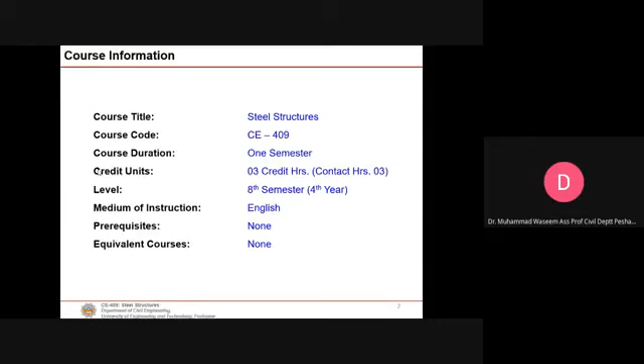Now when we look at the course contents, there is a specific aim of this course: to develop in the students the acceptance that steel can also be used as structural material, other than reinforced concrete. At the same time, the aim is to develop in students the ability to design the various structural members of a steel structural system, such as beams, columns, tension members, and connections.

So the aim is that we should develop acceptance about using steel as a structural material in the students, and also develop the ability in students to design the various structural members of a steel structural system.

Now looking at the CLOs, there are 3 course learning objectives. The first is about the description of models and theories suitable for the analysis and design of steel structural members. The second is to develop in students the ability to carry out analysis of steel structural members under axial, flexure, and shear, and to analyze connections under axial loads. The third CLO is to do the design of steel structure members under axial, flexure, shear, and also the design of connections under axial loads.

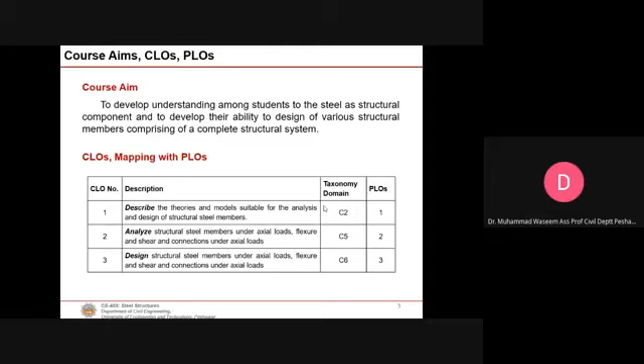In this slide you will find the assessment details and activities related to this course. There are three categories. First is sessional activities, comprising assignments, quizzes, and a complex engineering problem. There will be 3 assignments and 3 quizzes. I have not distributed the assignments and quizzes according to the class schedule yet, but hopefully by the 3rd class you will get the first quiz.

The percentage weightage of assignments, quizzes, and complex engineering problem will be 20%. There will be a midterm carrying 30% of the marks, and a final term carrying about 50% of the marks. This distribution is tentative and coupled with the direction and policies of the coordinator office, so it is subject to change based on their recommendations.

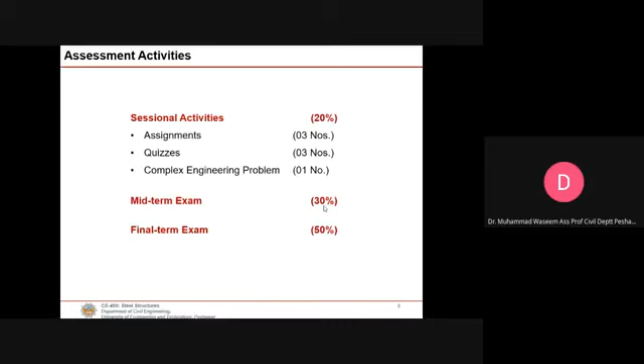The topics which we will cover in this course are mentioned in this slide. Today we will have an introduction to steel structures.

Then we will talk about the design philosophies, the different philosophies we can use for the design of steel structures, which we will discuss in the next class. The philosophies are allowable stress design and load resistance factor design. We'll go through those philosophies, and then shift our focus to connections.

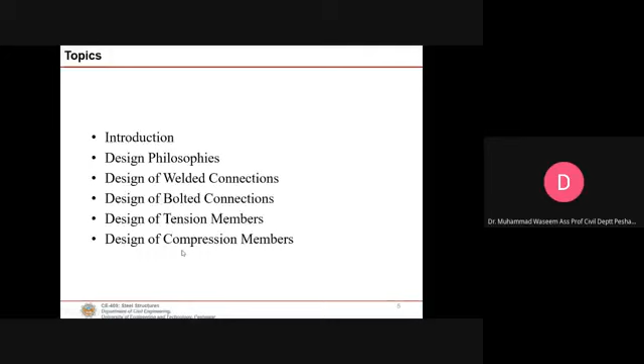There will be two types of connections we will discuss: first bolted connections, then welded connections. Once done with connections, we will shift to analysis and design of tension members, then the design of individual compression members. Then we will discuss column base plates, beams, composite beams, and lastly plate girders.

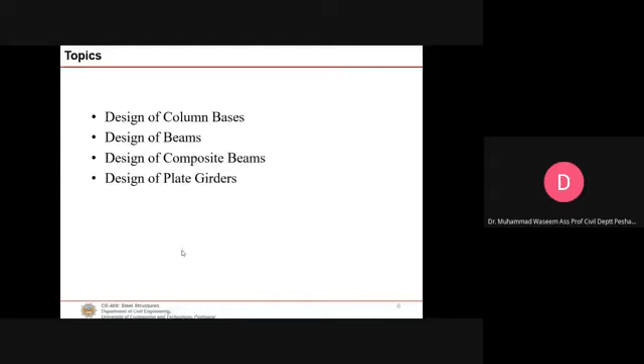Okay, this is all about the contents of this course, what we will be covering this semester, hopefully. So for books, you can refer to any one shown on this slide. You can see there are three books. The first book is by Segui, 5th edition.

I would recommend, or I will stick to, the first book, Steel Design. But you can consult Design of Steel Structures by Gaylord as well, the 3rd edition. This book is available in your library. There are a good number of books you can pick from, or issue from the library.

Then there is Structural Steel Design by Jack McCormac. You can find that book on the internet, but I have uploaded Steel Design by William Segui in your class, so you have downloaded that book.

So today's lecture is concerned with, or will be targeting, chapter 1 of the Segui book. Why I suggest we use the Segui book is that it's based on the most updated knowledge in steel structures. The Gaylord book was published in 1994, and after that, as far as I know, this book has not been revised, but things have changed since then.

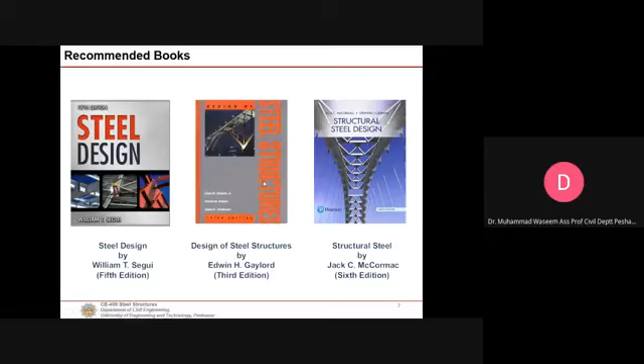I will stick to that book, but basically the information is the same, so you can consult any of these books. As I told you, one thing I missed is that our focus will be the design of individual steel structure members in buildings. We will not talk about bridges. In order to carry out steel structure design, we must have a manual or specification.

That manual is what we call the AISC manual. In the slide you'll see there is a 2nd edition of AISC, called Load and Resistance Factor Design, but as I told you, nowadays we have the 15th edition of this manual.

Things have been updating ever since the 1990s, so we will not use this older manual, but most things are similar across manuals. I have a soft copy of, I think, the 12th edition, and I will upload it in your classroom as well.

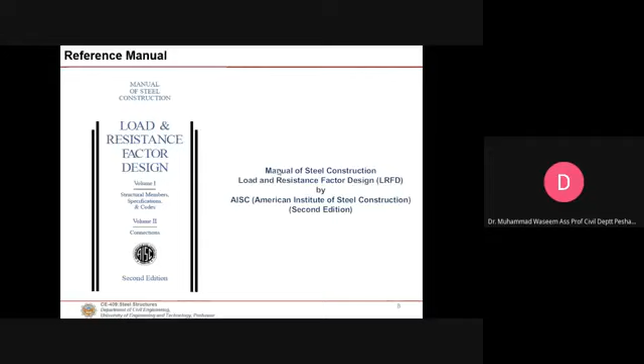I just wanted to inform you why we shifted from Gaylord to the Segui book, and what manual or specification we will use for designing steel structure members. Without a manual, you cannot carry out the design of steel structures, because the manual contains a lot of information about structural shapes, different materials, and design aids you can use while designing these members. That's why the manual is very important in this course.

So this brings us to today's lecture. Today is just an introduction to steel structures. When I deliver a course, I set some outcomes or objectives for the lecture. The first objective for today is to introduce the design process in steel structures and the different steel materials. Steel is an alloy, so what are the different steel materials you can opt for in design?

We have some designated steels, like you will see A36, A992. So what are those steel materials? We will talk about their behavior by looking at their stress-strain behavior graphs.

Then we will talk about different structural shapes. In reinforced concrete design, you might design a T-beam or a rectangular beam, but in steel structures you have to use different structural shapes. Those shapes can be wide flange sections, angles, channels, or T's. I will introduce those shapes in class.

Then, in order to design buildings, you need a code. What were the different codes used in the US? What is the currently most active code in the US, and what is the status of that code in terms of Pakistan, like what code is being followed? Then we will talk about the difference between the building code and specification. A specification, as I told you, is a reference manual. What is the difference between them?

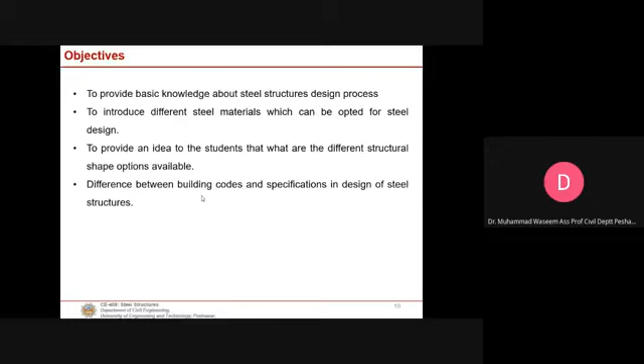These are some of the outcomes which I have set for this lecture. At the end of the lecture we should accomplish all of them. So as far as today's lecture content goes, we will talk about the structural design process.

Basically this design process and the design process for reinforced concrete design are similar. Then we will talk about building codes. What do we call building codes? What are the examples, what different building codes are being followed? Then we will talk about the design specification, and then about structural steel material.

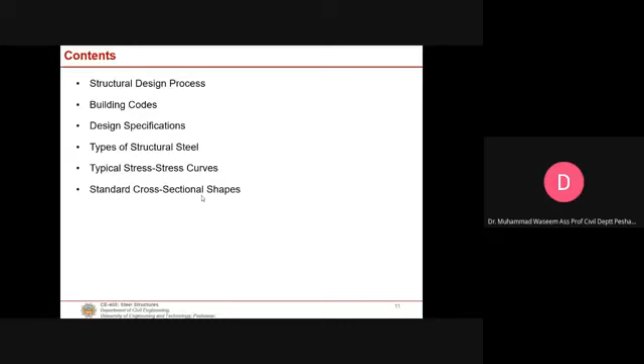We will talk about their behavior by looking at their stress and strain curves. Then we will talk about the standard cross-sectional shapes which you will be using for design of your member while selecting them. Now, first is structural design.

Structural design means the overall proportioning of the structural resisting system. Whenever the architect gives you a plan, it's a building plan. Buildings can be subjected to different kinds of loads during their lifetime. We design buildings for 50 years, and for that we have to come up with a structural system. That structural system consists of columns, beams, girders, and eventually, in order to transfer the loads, we also go for a supporting system of the foundation.

In order to proportion the structural cross-sectional members, there are loads acting on a building, and those loads are transferred to the ground through columns and beams. Now, what is their cross section? We have to keep the resistance of individual members greater than the applied load effects, and that is accomplished through using area or cross-sectional area together with the material.

So in structural design, we do the overall work - we devise a structural system which consists of columns, beams, and foundations, and we also proportion the individual structural members based on the resistance which they derive from cross-sectional area and the material.

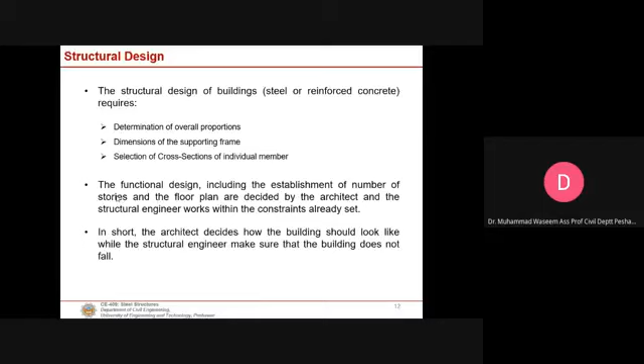Now, once the functional planning is done, that is handed over to a structural engineer. The structural engineer has to devise a structural system consisting of different structural members in order to transfer or resist the applied loading during the lifetime of the building.

Now we will go to the design process, and there are different phases in the design process. As I discussed, the first phase in the design process is the functional planning. Let's take an example of this academic block - what is meant by functional planning for this academic block, like what should be the sizes of the rooms, where should the windows be located, where will the corridor be located, and how many stories will there be in this academic block.

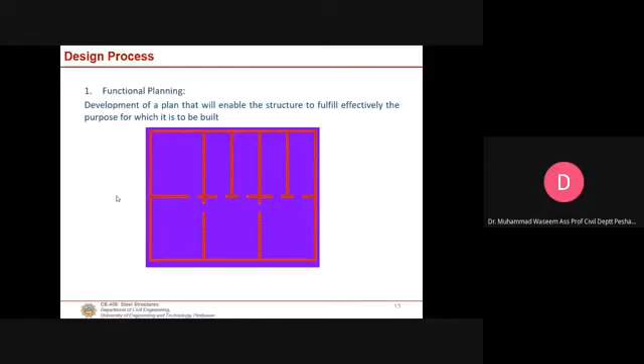This is called functional planning. We can call it the development of a plan that will enable the structure to fulfill effectively the purpose for which it is built. This is done by an architect, and once the functional planning is finished, the plan is handed over to a structural engineer.

So the second step in the design process is the structural scheme. What is a structural scheme? It's about devising a structural system which consists of columns, beams, girders, and slabs. This is done by a structural engineer.

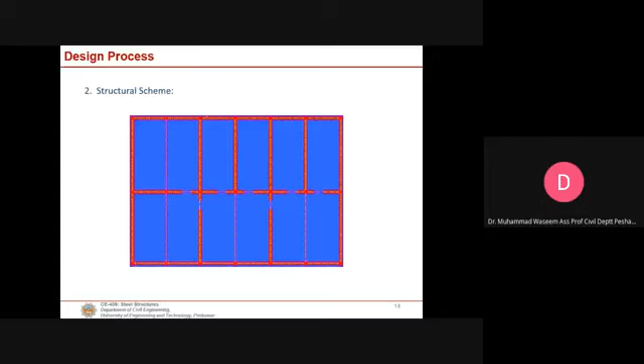It's the structural engineer who decides the overall proportioning of the plan, like where the columns should be located, where the beams should be located, how much will be the sizes of the beams, and how much will be the sizes of the columns. This happens after the functional planning, when the structural system is devised by the structural engineer.

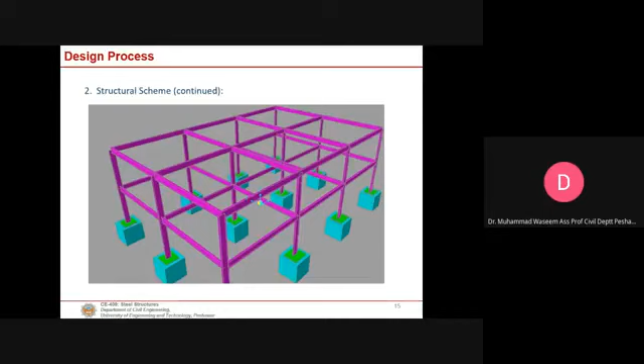So this is a continuation of that structural system. You use beams, you use compression members, and you might be familiar with these components from your concrete design studies. The loads are transferred from beams to columns, then to the base plate, and finally to the ground. This is just a 3D view of that structural system.

After the functional planning and the structural scheme, you have to come up with the individual sizing of the members. There are some guidelines to select individual beam members. For example, the length to depth ratio of a member should be less than or equal to 800 by Fy. Say you want to select a beam, you have to decide about the depth of that beam.

This guideline will be a rough estimate. Like we have seen, in case of simply supported or continuous members, we always take a start from h by 20 or h by 16, if you remember.

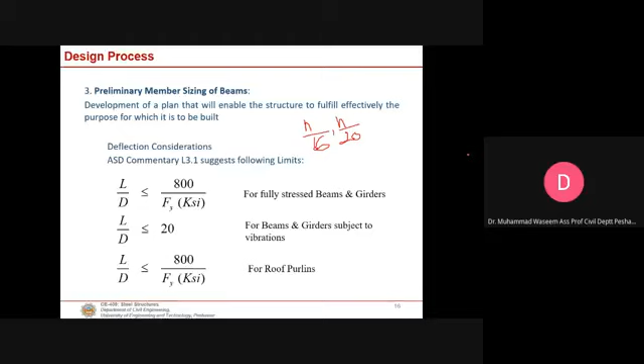So you have to do the individual member sizing for beams, and then use some criteria to select the cross section for the beams, and similarly for the columns.

In steel structures, your beams are susceptible not only to material failure, but they can also fail due to stability issues. There are two types of such failures: one is local stability failure, and the other is global stability failure.

Once you want to avoid stability failure, you have to provide some bracing. For example, there are two beams. This is called an I section or wide flange section, and it is susceptible to translation when loaded, as well as some twisting, which we call lateral torsional buckling. In order to avoid these stability failures, these beams are braced like this.

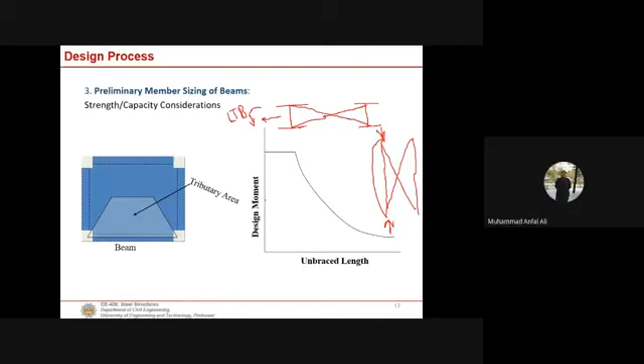You have to use a larger cross section. Okay sir, but you have to do this bracing, like what I have studied in steel structure. These beams are located at a very high height, and bracing you have to do because these beams are susceptible to twisting and translation when they are loaded.

And in order to, reinforced concrete design में आप क्या करते हैं? You don't want to have a bar slip, that's why you provide those hooks. अगर वो hooks आप provide नहीं करेंगे तो हो सकता है कि उसकी फुल यील्ड स्ट्रेस डेवलप होने से पहले ही वो फेल हो जाए, बार स्लिप का प्रॉब्लम आपके पास आ जाए. So that's why you use deform bars and you provide those hooks.

But I wanted to highlight that this is an important aspect in steel structure, bracing. You have to do bracing. Like, for example, if the height is not that much, you will have to check first: is my member failing in local buckling, is my member failing in translation? If it is not failing, if the load is not that much, you don't have to do the bracing. Is that clear to you now?

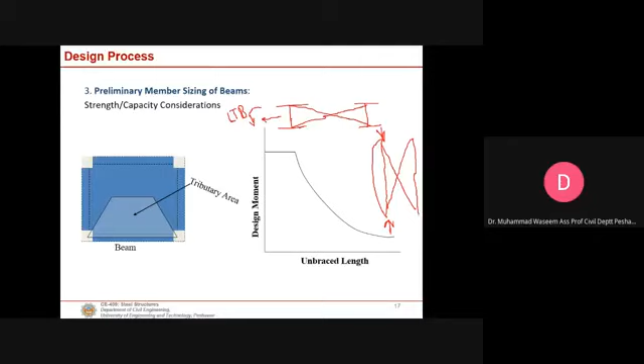Yes sir. Okay, now similarly, if we proceed, then we come to the column. In column, what happens is load comes from the slab and is transferred to the ground through these vertical members. You also have to do proportioning of these columns. And one other aspect, as I highlighted in case of beams, is that not only can it fail in material failure, it can also fail in stability. If there is a stability issue in your beams, you have to do the bracing.

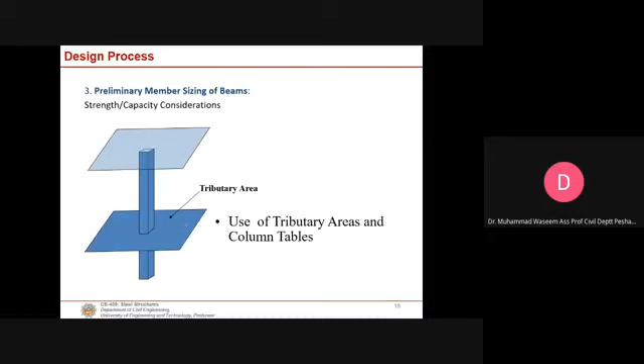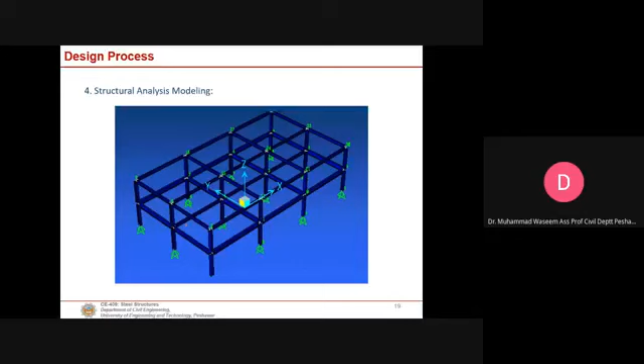So after that we have this step we call the structural analysis, and you can see this is a 3D view, a model of that building which has been generated in a software. You can use SAP or ETABS software to come up with this model. Once you do the structural analysis, you compute the demand in your members.

Once you know the demand, then you have to do the design review. Design review means that the demand on your structural member should be less than the resistance provided by that member, and that resistance is derived from the cross-sectional area and the material strength. So the resistance in the member against the demand should be more, and you should also keep a margin of safety in that.

Like there, if the demand is 2, the capacity or resistance which the member is providing, it should be 4. So you will keep a factor of safety because you are not sure about the live loads as well. So you have to take care of that.

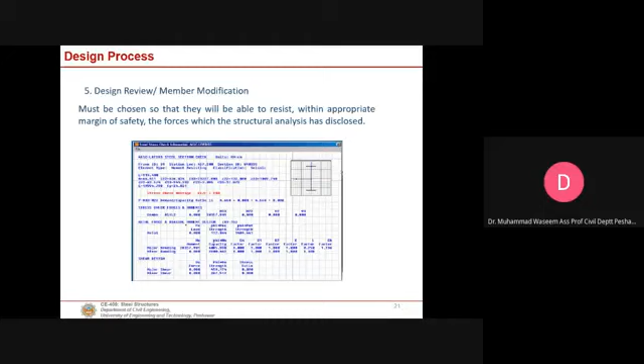Then finally, once you are done with this process, you make cost estimation for various tentative structural layouts. Like if I use this member, I place it there - how economical it is, am I satisfying the strength criteria, is my building able to resist all the loads. But the thing is, in case of steel structures, your objective should be that you should use minimum amount of steel.

And in steel structure, you have to use members which have light weight. If the weight of the member is more, the cost of the member will be more. Now this cost estimation not only depends upon the structural members, but it is also controlled by the labor, who will be fabricating this steel structure building. So the cost of the skilled labor is also important because the skilled labor cost in steel structure is very high. So you have to do all this consideration.

You will also look at the availability of the steel material. For example, you are making a building in Karachi - in Karachi you have a lot of factories producing steel, so there is no issue. But for example, you are building a steel structure in Miranshah or some other area which is very far away, so you will take care that the material you're using is available in the market and will not be too costly for your design or structure.

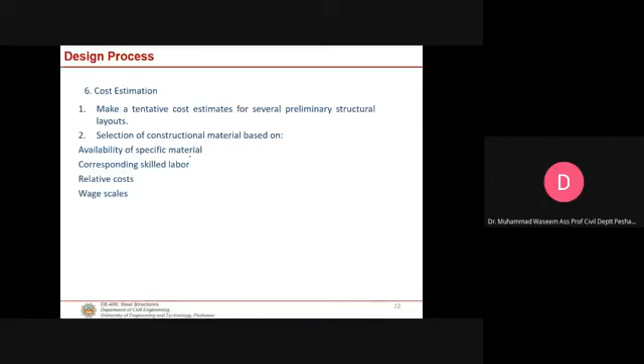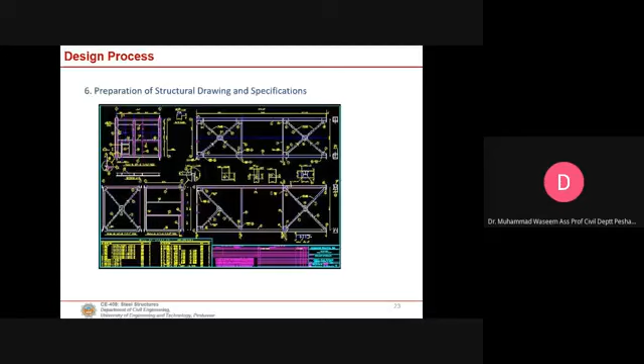You know this process, you have been familiar with this process, but what I wanted to highlight is that in steel structure, you will use different shapes. You will not use those rectangular or T sections. So stability is also an issue. In steel structures, this issue was not there in reinforced concrete design, but in steel structures it matters.

Once we are done with the design process, this is the philosophy of structural design: the resistance of material, which it derives from the cross-sectional area and the material strength. When we talk about material strength in steel structures, it means the yield strength and the ultimate strength. Now, the strength of the material or the resistance of the material should always be greater or at least equal to the effects of the applied loads.

This is a very important and basic equation, but there is a constraint on this equation: you should evaluate the resistance, for example resistance against compressive force, against the stresses produced by compressive forces. You cannot evaluate the tensile resistance against the compressive load effects. So basically, you have to evaluate or use this equation for the same loads.

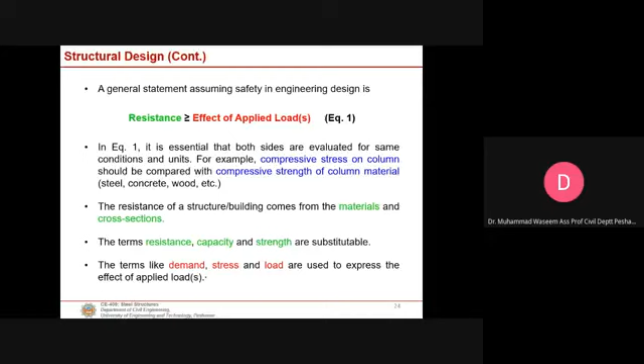In structural design, sometimes there will be terms which have the same meaning, like resistance, capacity, and strength - they mean the same thing. And terms like demand, stress, loads - they are the same thing, used to express the effect of the loads.

So in structural design, you have to satisfy a limit state as well. A limit state is a condition. A limit state is a condition beyond which a structural system or structural component ceases to fulfill the function for which it has been designed. So you have to satisfy the limit state in structural design in LRFD. There are three types of limit states.

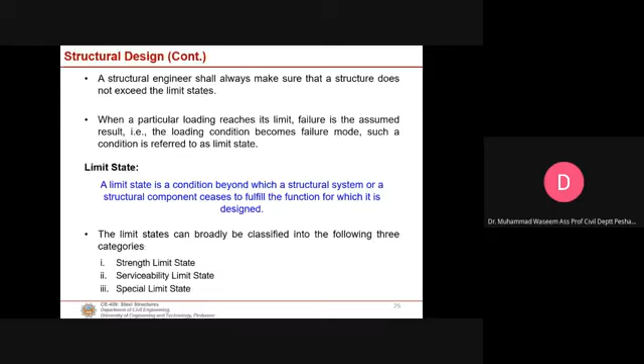We call them strength limit state, serviceability limit state, and special limit state. Strength limit state means that the bending moment or the shear or the torsion should not exceed the capacity or the resistance of the material or the member. And obviously, there must be some factor of safety between the resistance and the demand.

The second is the serviceability limit state, which means that you should avoid cracking, deflection, buckling, and stability. The third type is the special limit state. A special limit state - you have to consider that the life of a building is 50 years. In that 50-year time, it should be able to resist any explosion, or loads caused by earthquakes or wind loads. So these are called the special limit states.

Now, special limit states are costly. For example, if you want your building to satisfy the special limit state, it will make your structure costly. It's not economical to go for this limit state. But in areas where you experience earthquakes regularly, you have to satisfy this limit state.

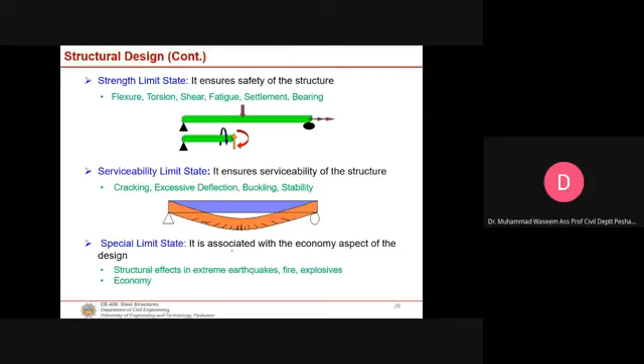So as I told you, the aim of the structural engineer for the design of steel structure should be to use a lighter structure - this will make your structure economical. The other factor is that the labor cost for steel structure is very high, and you have to consider it while deciding where you want to build that structure.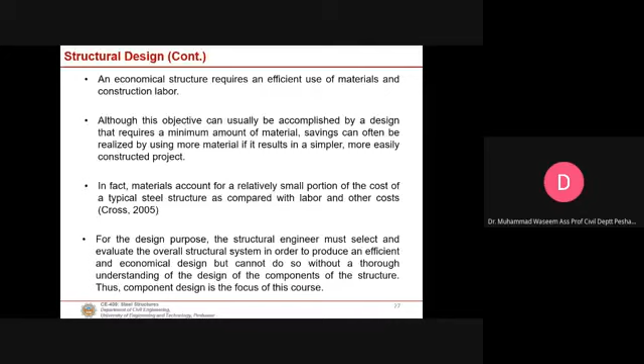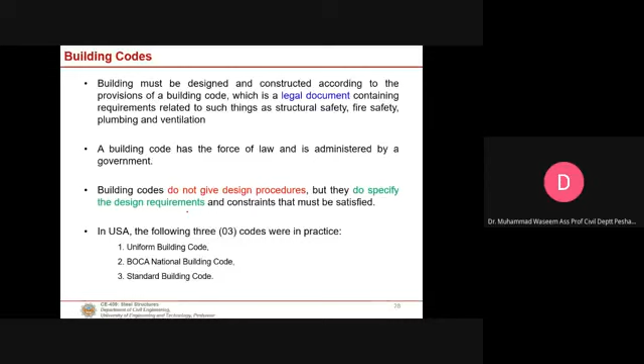In US there were 3 codes: Uniform Building Code, BOCA, National Building Code, Standard Building Code. They were practiced in US, but there were some inconsistencies among these codes. So in 2003 they came up with a new code called International Building Code, which is the most followed worldwide. So the most recent version of a building code is International Building Code.

Of course, we have some Euro code as well, but in the context of US, the most recent version of the code document is International Building Code. Before that, Uniform Building Code was adopted. Now in Pakistan, the building code of Pakistan has been adopted from Uniform Building Code, but now we are trying to adopt the International Building Code. So what is the most recent code of practice nowadays? You should know that it is International Building Code.

And there is the loading code, American Society of Civil Engineers 7, titled Minimum Design Loads for Buildings and Other Structures. So ASCE 7 and IBC are the most updated versions of the codes. IBC is a complete code, but it uses loads, and for loads it refers to this ASCE 7 document, which is Minimum Design Loads for Buildings and Other Structures. Now, the following codes and standards are currently being used in US, as per when this book was published.

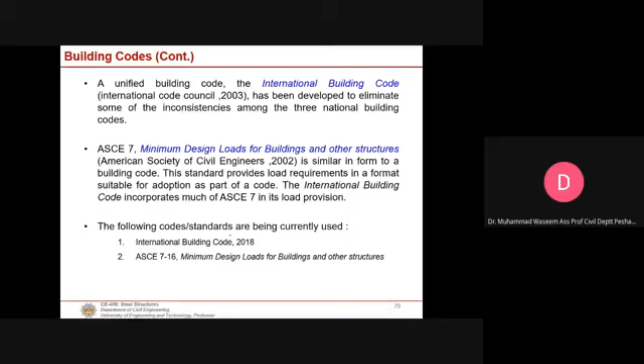Let me come back to the classroom. Yes, sir. Okay, any question or comment? No, sir. Okay.

These design specifications have no legal standing, but you can adopt them in your policy. For example, the government can adopt it and force it that you would use this specification.

What is the example of specification for the case of concrete structure design? Do you have an idea? Any idea? Which specification do we use for concrete structural design?

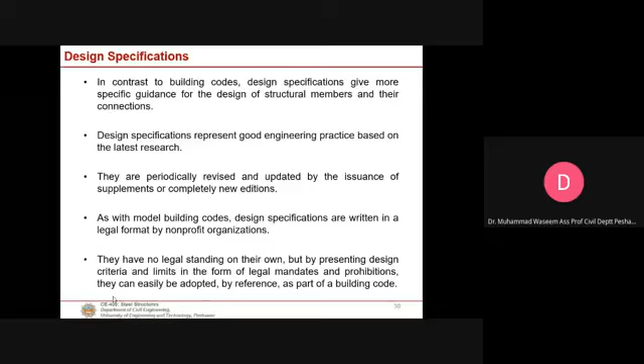Okay, in concrete we use ACI, American Concrete Institute specifications. They have equations, so when you see an equation in your book, it is coming from ACI 318. Similarly, in steel we will use American AISC, American Institute of Steel Construction specifications. They contain important equations which you can use for the design of your structures.

So what are the different specifications? As I discussed, we are going to use the American Institute of Steel Construction specification, which provides the design of steel structure buildings and their connections. This is of our concern, because in our course we will study design of structural steel members of a building and their connections, so we will extensively use AISC.

So if you want to design steel structures for a bridge, you can consult this specification, which is AASHTO. AASHTO stands for American Association of State Highway and Transportation Officials. It covers the design of highway bridges and related structures.

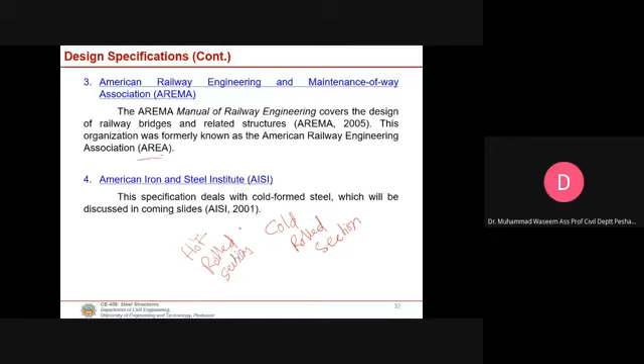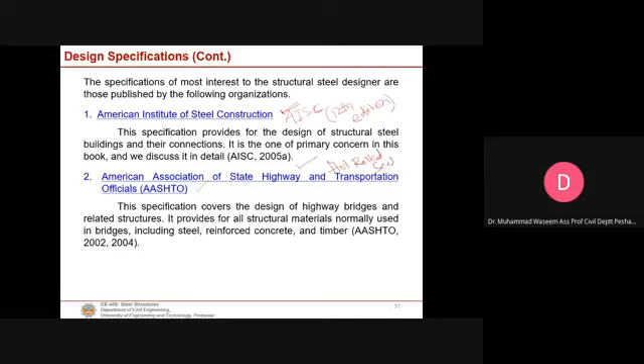Then we have another specification which is used for cold rolled sections. This specification deals with cold formed steel, which we will discuss. We will discuss the difference between cold roll sections and hot roll sections, as these are the two types of sections. So AISC is for hot rolled steel sections.

Now we discussed that we will use steel. What is steel? Steel is an alloy of iron and some different material. Steel is not a naturally occurring material, it is derived from iron while mixing it with carbon and other elements which include chromium, vanadium, copper, manganese. So this is an alloy. Now what is an alloy? Alloy is a homogeneous mixture of two or more elements, and in most cases in steel you will find iron and carbon. If you add carbon into iron, it will increase the strength of this mixture which we call steel. Any idea from where iron is derived?

Where is iron derived from? What is the source of iron? Sir, ores, from the earth. What are the names of those ores? Sir, forgot it, I studied it in geology.

They are hematite and magnetite. So iron is derived or obtained from ores which are called hematite or magnetite. These are two of the ores from which iron is derived.

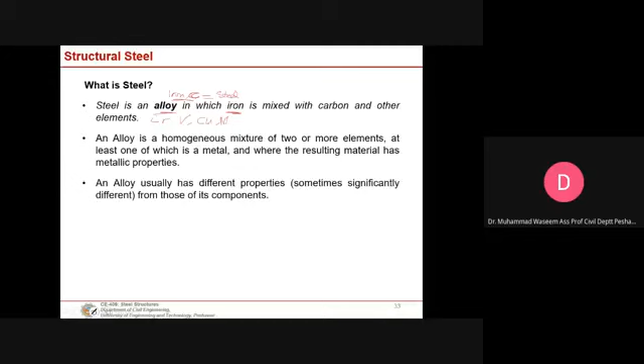That iron is mixed with carbon, combined with carbon, manganese, vanadium, to produce steel. Steel is an alloy, it is not a naturally occurring material.

Now when was steel used? Steel was used in the late 19th century, and the first bridge constructed out of steel was the Eads Bridge, constructed in 1874 in St. Louis, Missouri, in the US.

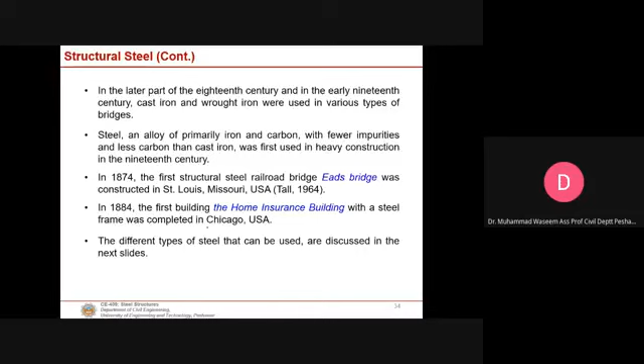The first building constructed from steel was in 1884, and the name of that building was the Home Insurance Building, which was constructed or completed in Chicago, USA.

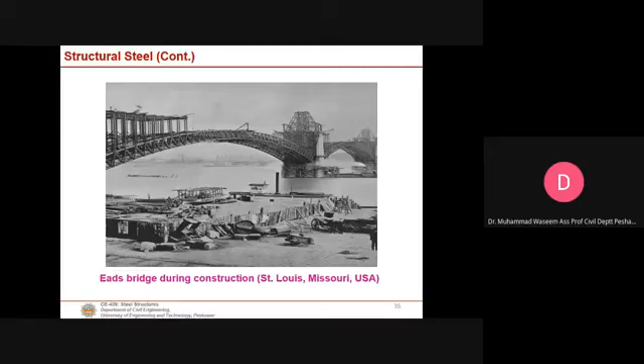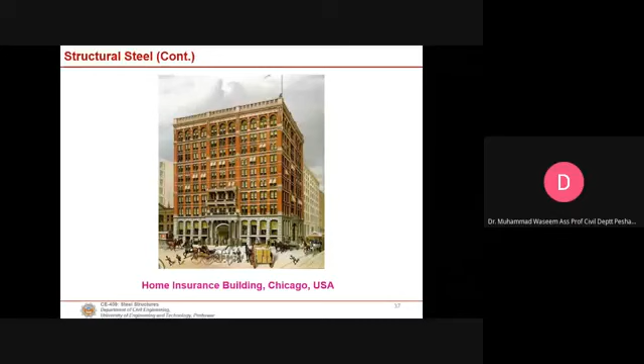Now we will come to the types of steel. Basically we can classify steel broadly into three categories. The first category is plain carbon steel, in which you just have iron and carbon less than 1%. If this is the composition of the steel, we call it plain carbon steel or mild steel.

Mostly we will be using this mild steel. It has been designated a special name by ASTM, we call it A36 steel.

If you mix iron and carbon plus some other elements, we call it low alloy steel. So we have plain carbon steel and low alloy steel. In low alloy steel, apart from carbon and iron, we have some other components, and those components are less than 5%.

When you add more components or elements in the steel, the strength of the steel is enhanced, but at the same time there will be a reduction in the ductility of that material. So you are enhancing the yield strength or the ultimate strength, but reducing ductility. Plain carbon steel will have more ductility compared to low alloy steel.

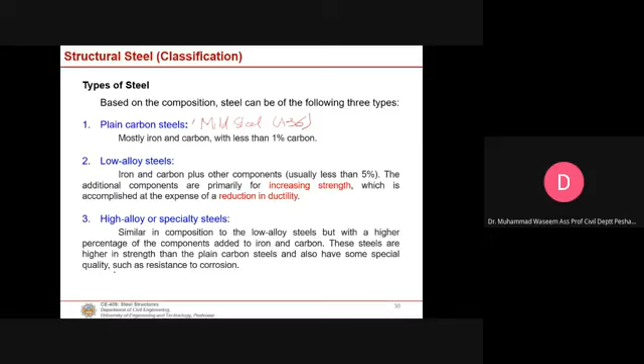If you further enhance this, there is a third category called high alloy steels. This is similar in composition to low alloy steel, but with a higher percentage of components added to iron and carbon. These steels are higher in strength than plain carbon steel and also have special qualities such as resistance to corrosion. So these are the three types or categories of steel.

Now these steels have been designated different names by an organization called the American Society for Testing and Materials, which designates structural steel. One of the most commonly used structural steels is mild steel, designated as ASTM A36, or simply A36.

So we will discuss its stress-strain curve and behavior, which I will show in the next slide. Basically, A36 has a yield strength of 36 ksi, and the tensile strength of A36 is 58 ksi, varying from 58 to 80 ksi.

Now, an important thing to note is that structural steel is designated by specific nomenclature given by ASTM, and the most commonly used steel is A36 or ASTM A36. We will be using this steel for most of the design of components in this course.

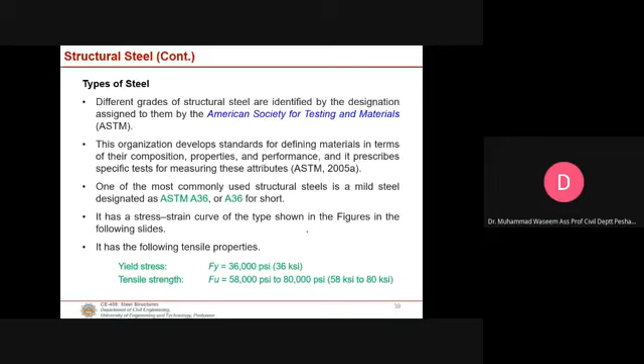Apart from A36, we have other grades designated as ASTM A572 Grade 50 and ASTM A992. These two steels are very similar in both tensile properties and chemical composition, with a maximum carbon content of 0.23%. So we will see a comparison between these three steels, like A36 steel.

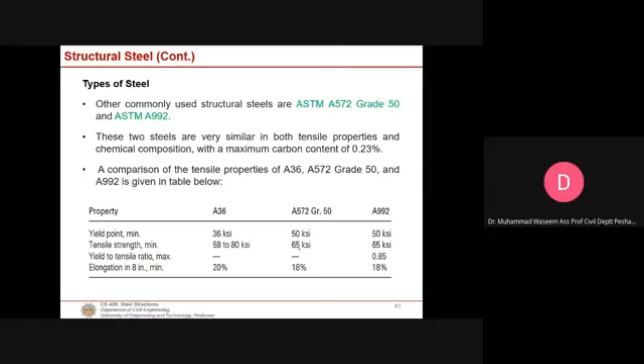What is the minimum yield point? What is the tensile strength? How much is the ductility or elongation in this steel? Similarly, A572 has about 50 ksi as yield strength and 65 ksi as tensile strength. So apart from A36, we also have different structural steels which you can use in your design.

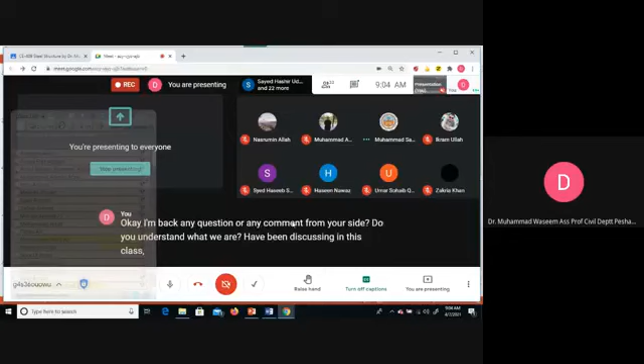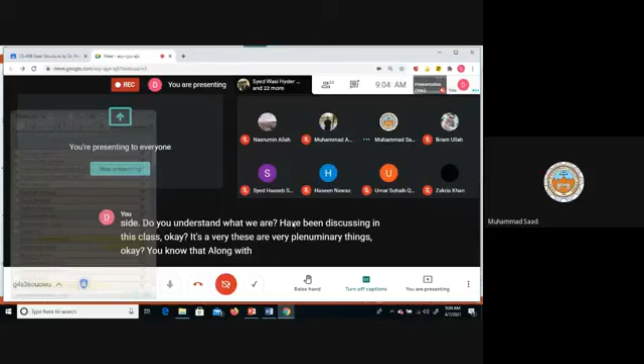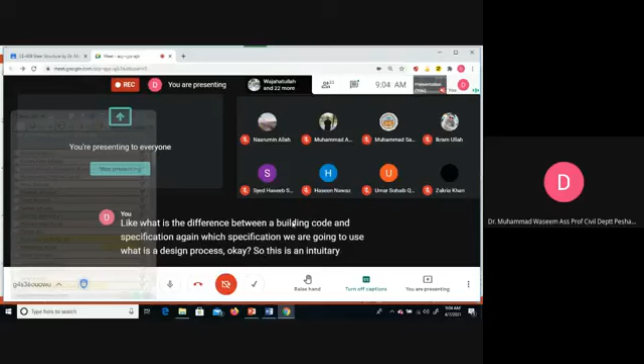Yes sir, like what is the difference between a building code and specification? Which specification we are going to use? What is a design process? Okay, so this is an introductory class, but we have to go through these contents.

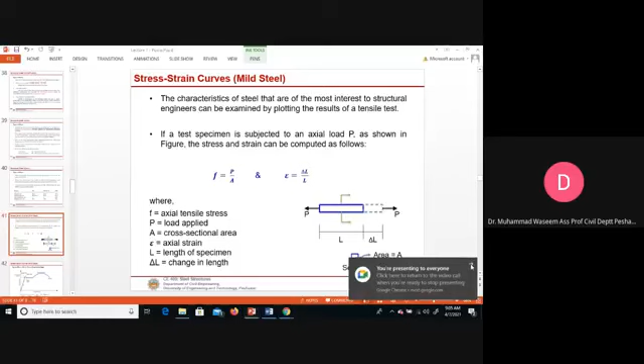Okay, now we have discussed that A36 or the mild steel will be of our concern. So we will try to look at its behavior, and the behavior of A36 steel we can visualize, or we can comment about it by looking at its stress strain curve.

So the characteristics of the steel which are of most interest can be examined by plotting the results of a tensile test. The behavior of mild steel, or the stress strain behavior of mild steel, can be examined by looking at a simple bar which is subjected to axial tensile loading.

So in this slide you will see a steel bar which is subjected to an axial load. The intensity of that load is P. The axial tensile stresses, or the load effects produced in this member, are designated by F, and the entire magnitude of F can be computed by dividing P by its cross-sectional area A.

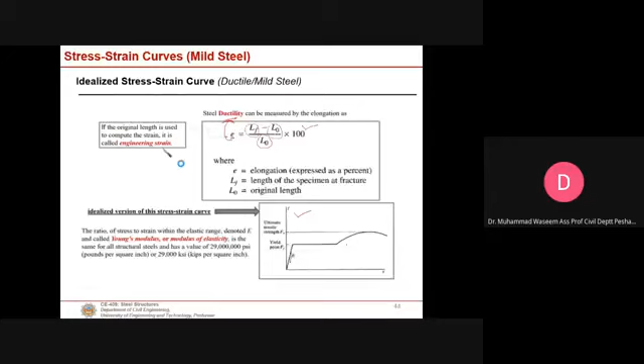Now there are some definitions of different terms we use. What we call the rupture point is the point on the stress strain curve at which the material fails or fractures. When we go back to this stress strain curve, this is the rupture point, but we ignore this point. We take the ultimate strength instead. We do not use that rupture strength. So this part is discarded.

Starting from here to here, let me mark that cross. Up to this point is where we use this one.

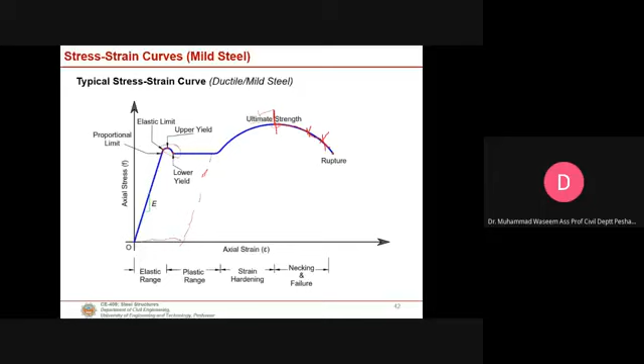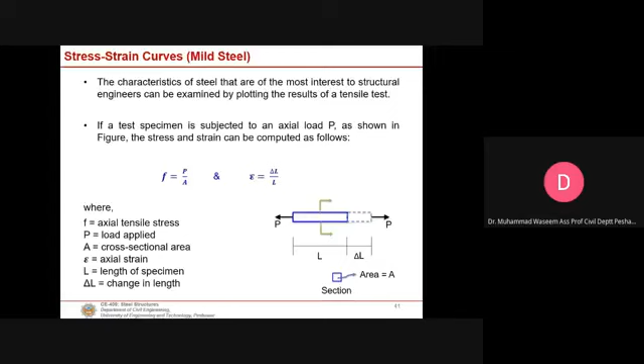So what is the engineering stress? We know that if I come back to this same figure, F is a stress, and if we use the original cross-sectional area of the bar, we call this computed stress as... strain. Engineering stress: in the computation of stress, if the original area or initial area of the bar of the material is used, we call it engineering stress.

The strain obtained by using the original length of the material in the calculation, we call it engineering strain. But if we use cross-sectional area, we know that when the load is applied, the area of the member keeps on reducing, due to the Poisson effect.

If in the computation of stress we do not use the original initial area and instead use the area at that very particular moment, we call that stress as true stress. And if we do not use the original length for computation of strain, and instead use the length at that moment, as when we apply the load the length keeps increasing, if we use that length in computation of strain, we call it true strain. So there is a difference between engineering stress and true stress, and a difference between engineering strain and true strain.

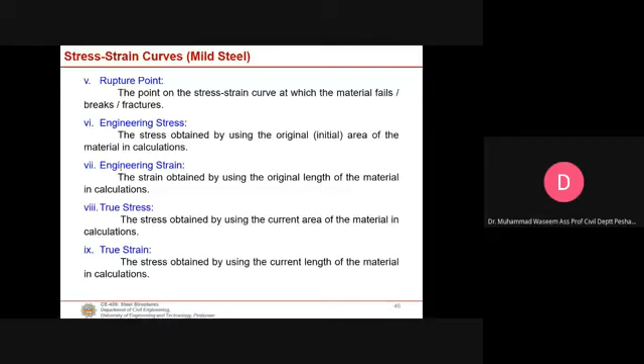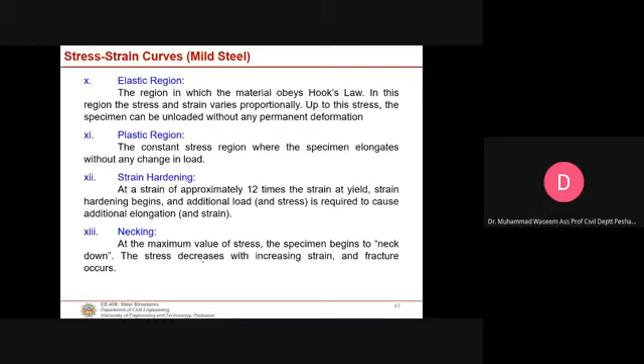So necking - what is necking? Necking is the reduction in the area of the bar, when there is a pronounced reduction in the cross-sectional area of the bar. When does necking occur? It occurs at the maximum value of stress, when the specimen begins to neck down. The stress decreases with increased strain and the fracture occurs.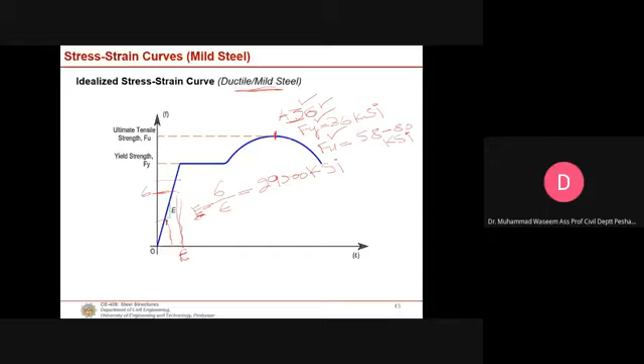So this is referring to this region, when there is a decrease in stress with increasing strain, and at the same time the cross-sectional area starts reducing at a very fast pace.

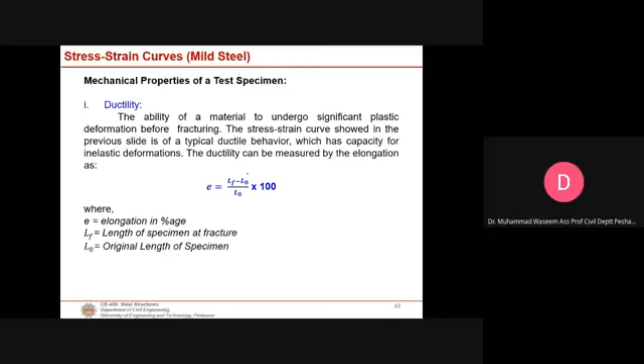So what is modulus of elasticity? Modulus of elasticity is the ratio between stress and strain in the elastic range. Toughness is the ability of the material to absorb energy, while resilience is the capacity to absorb energy in the elastic range. So there is a difference between resilience and toughness.

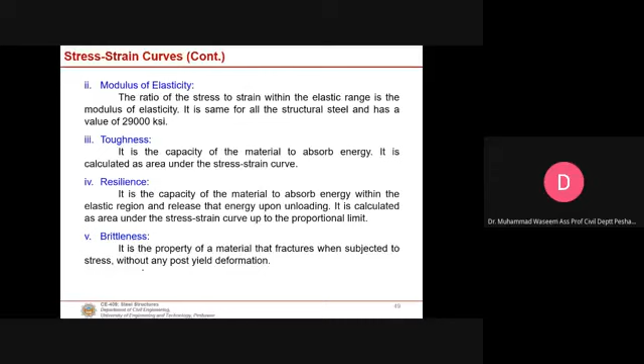So there is another property we call brittleness. It is the property of the material that fractures when subjected to stress, without any post-yield deformation or without any warning - it ruptures. This is called brittleness.

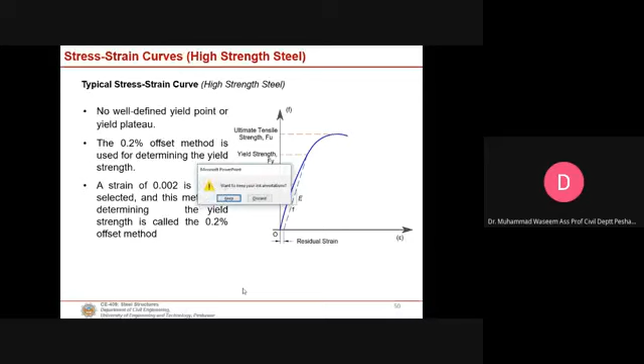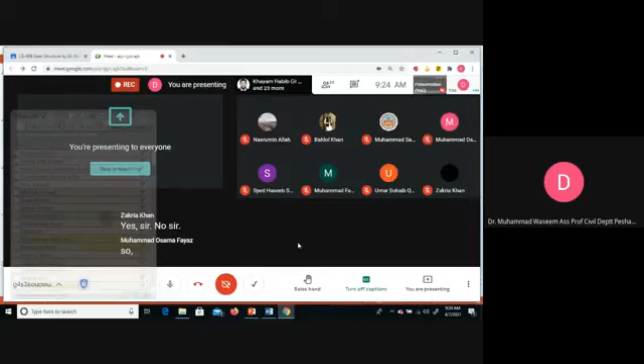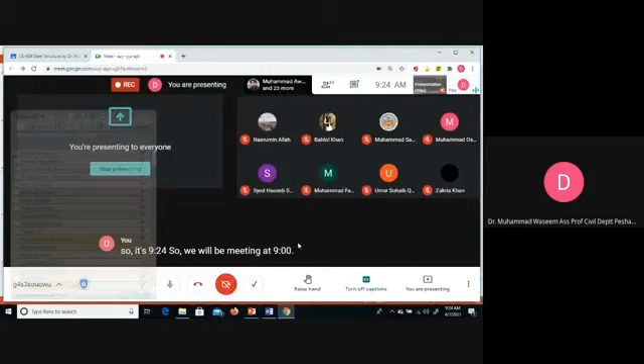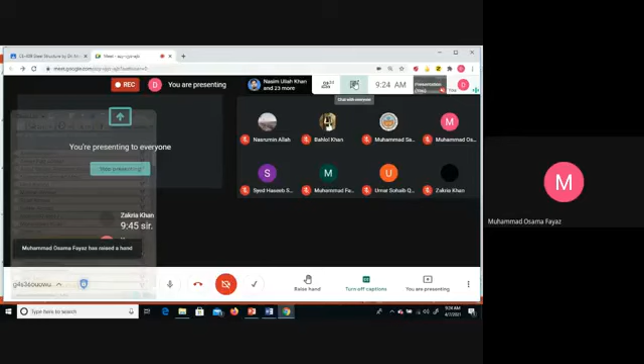is that okay? Yes, sir. आप लोग सो तो नहीं गए यार? No, sir. आप लोगों को समझ आ रही है? Yes, sir. अच्छा, so it's 9:24. So we will be meeting at 9:40. Is that okay? 9:45, sir. Okay, 9:45 we will meet. Okay. Okay, sir. Okay, have a cup of tea. Okay. Okay.